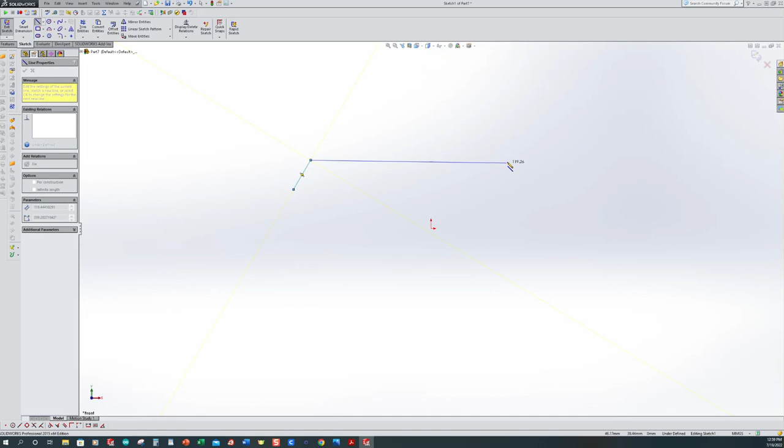Don't be too concerned. Make sure that this thing snaps horizontal. Let's pull your angle out. My sketch is just all jacked up, but I want to fix all of this stuff.

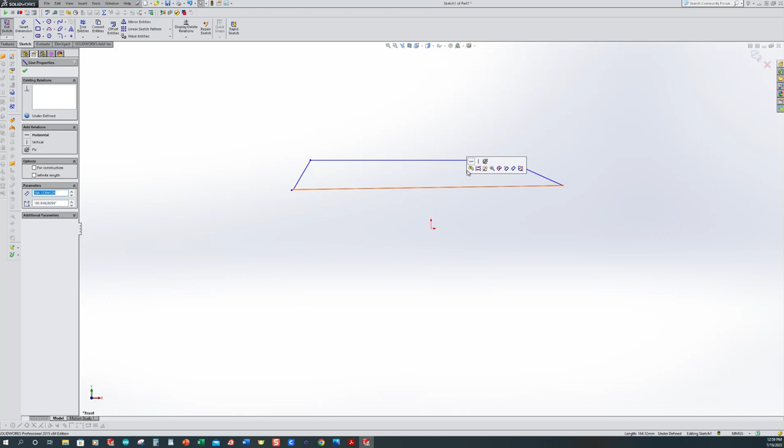My top line is horizontal, but I'm looking at this bottom line and it does not look horizontal. Let's go ahead and correct that. I'm going to come up and pick on the line and not move my mouse pointer, and then we have the little flyout that pops up that says make horizontal. So that's kind of a quick shortcut.

I'm going to click out in the paper space, and I know that both of these lines I want to make equal. So I'm going to hold my control down, make a selection, make the other selection, and make both of those lines equal. It may not be the shape you're looking for initially, but...

We're just adding relations, so we got to take this thing in baby steps. I also noticed that when I drew this, I've got a little bit of an issue down here in the bottom left. If you're looking at that, I'm going to zoom way in on it. There's an extra line for some unknown reason, so I'm going to pick it, hit the delete key, and then use the F command, just the F on the keyboard, for the fit. So we've now moved this thing out here.

I don't know that I've talked about using a point on here, so you can actually use points for relationships. I'm going to come up and select a point, and tickle this bottom line until the midpoint shows up. All I'm really doing here is making this thing a little easier to select. I've placed that point there, and I'm going to hit my escape key. Notice I can actually see that, where I couldn't really see the midpoint before.

I can select it a number of other ways, but right now I just want to put a point here so we can cheat a little bit.

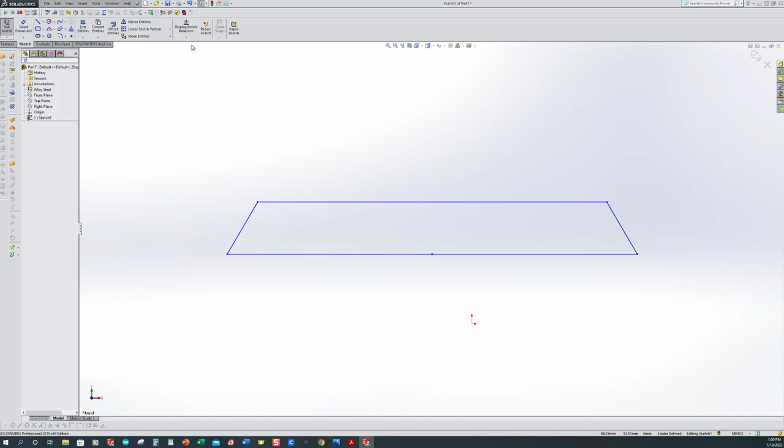So I want to come up to add relations, or display, delete, and add relations. I'll drop the chevron down and select add relations. I want to pick that point I just drew and our origin, and make those two coincident. Now notice this line's turned black.

Click out in the modeling space somewhere, go ahead and accept that. Click out in the modeling space, and our point is fully defined, and this bottom line is pretty well defined, except the endpoints on it do not have a distance on it.

So we're ready to start doing some dimensioning now. Memory tells me that this is 80 millimeters.

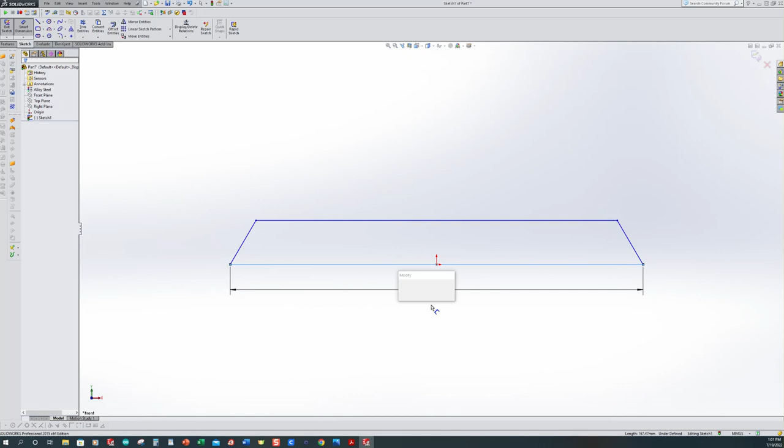I could come up here because opposite angles are going to be equal, but I'm going to come over here just to keep it like what our drawing said, place it down, and that's going to be 45.

Now notice we've got our drawing that is pretty well black, except we've got to figure out how to get this little line up here that's still blue. We need to make sure that we fully define it.

So I come up and I look at my dimensions, and it looks like we have a dimension of 10 millimeters across. Not 10 millimeters on this, but let's go ahead and dimension this.

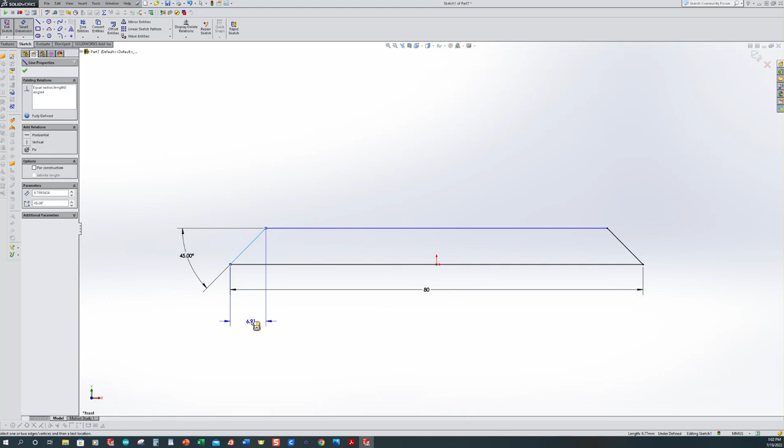So when I pick this line, I pull it out. I have this parallel dimension, not what I want. I can pull it up here, or I can pull it down here - either one will be sufficient. I'm just going to pull it up here, place it out of the way for a moment, and we're going to say that is 10.

Now I am fully defined, so I'll click out in the modeling space. I'll look over here in the bottom right hand section, and it does say that we're fully defined. So when I exit my sketch, we're ready for our extrusion.

Now when I look back at my drawing, it looks like this extrusion is going to be 30 millimeters. So let's go ahead and say 30 in our depth or magnitude, and we're going to accept it.

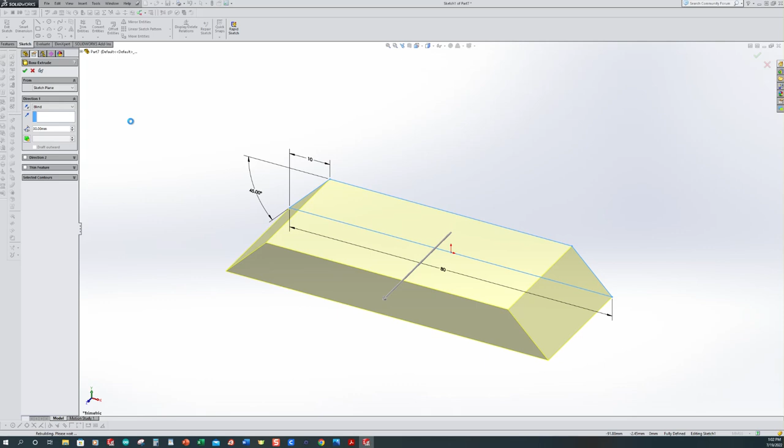Now it doesn't look like we're anywhere closer to where we were, but all we've done is this bottom section. So the next thing I want to do is the basic shape of this feature here is a rectangle. When we look at our drawing, it says that the rectangle is 40 wide and also 40 tall overall. So I want to select an extruded boss base.

It asks us where we want to start from. I could start here or on the back side, or I could pick a plane. I'm just going to pick this front face for ease, so I'll select the front face.

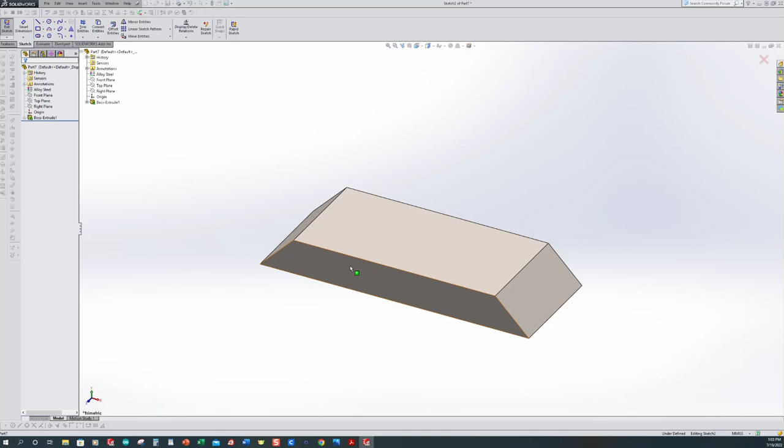I need to use the Control-8 command because your sketch may not orient normal to you, but we want to draw this thing where we're looking normal to it when we first get started.

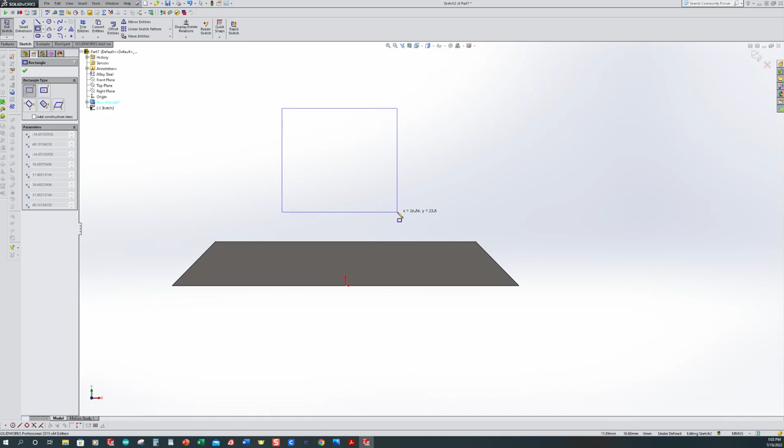So I come up and I want to select a corner rectangle. Make sure that you are in corner rectangle - if you're in something else, go ahead and select it. I'm just going to draw something along these lines, then I'm going to hit the escape command.

With that being said, I want to come up and add a relation. My point's still selected since I didn't use the escape command or get out of it, and it says existing relations is midpoint. I could use the fix command, but that's not what I want. Instead, I want to come down and pick our origin.

So now I have the point of origin and point number 5, or whatever point yours is called. It's giving me the most logical thing would be vertical because it's not really close to it. Horizontal doesn't make a lot of sense, but coincident is the one that I really want. So I select coincident, and now this bottom line has turned completely black.

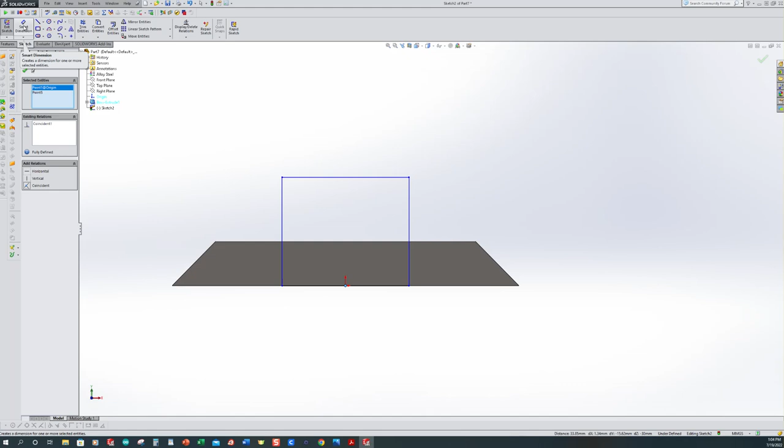So smart dimension is the next command we want. We remember that this thing is 40 millimeters wide, and we also have to give it a height dimension because we just have this blue line to contend with. So I come and pick this vertical line, pull it out, place it down, and it is 40.

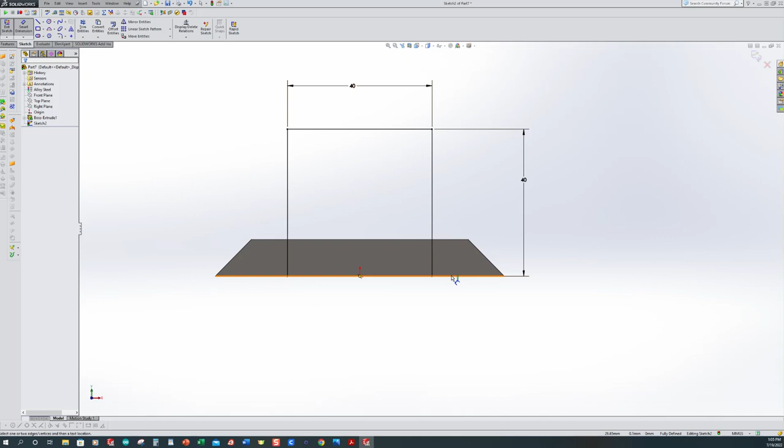We now click out in the modeling space somewhere. Both dimensions are black, we've got this constraint down here, and we are fully defined. I'm going to rotate mine around just a little bit.

I think my extrusion is going to go the wrong way. We'll soon find out, so I select exit sketch. Sure enough, it is headed out the wrong direction, not the one I want. But we're going to do something slightly different.

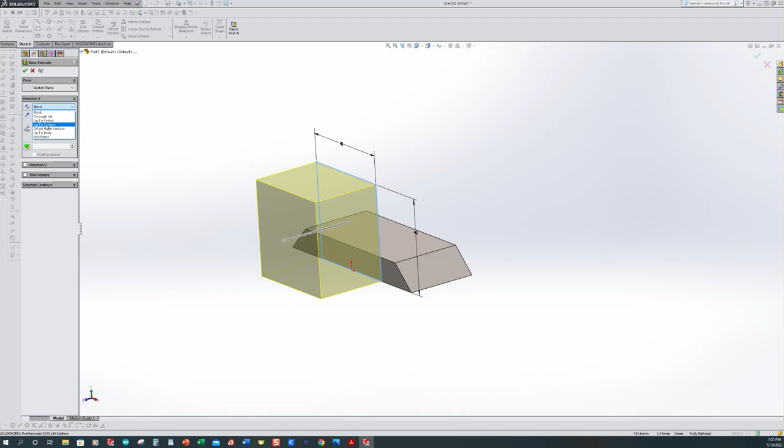I know that it's 30 millimeters, but what I want to do here is use a new command we haven't done before, and this is going to be an up to surface. Now, what surface do I want it to go to? Because if I change one extrusion depth, I want to make sure that something follows it all the time. So the surface I want it to go to is this back side surface.

It gives me the preview. I am happy with what that looks like, so I'm going to go ahead and accept this boss extrude.

Now, another thing that people tend to get really bothered by is this semicircle right here, which has a radius of 20, giving us a diameter of 40 millimeters across. It's also centered up on this and runs tangent to these little lines here.

Some people want to draw these semicircles and try to get it all done in one fell swoop. We're not really going to worry about that. The other part about this is this thing sticks out 10 millimeters on one side, but it goes all the way to the back side on the other.

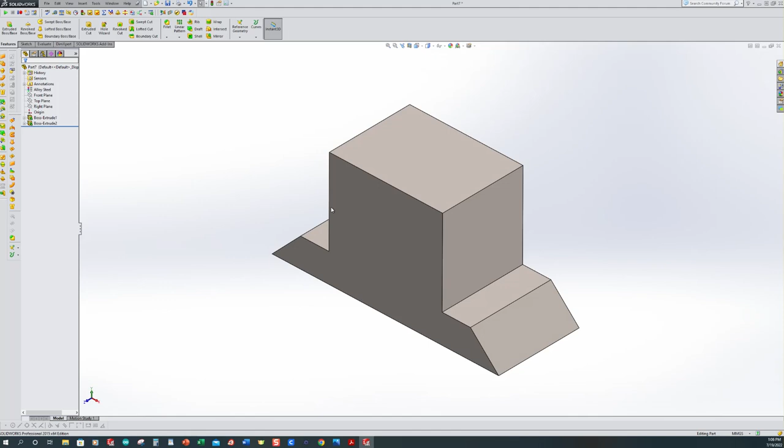So we're going to use that hint we had just a moment ago. Control-7, so everybody's view kind of looks the same. We want to use the extruded boss base, and now it's going to ask us what face, plane, or planar surface we want. I'm going to pick this very front face that we're looking at.

Use my Control-8 command to draw normal, and now I want to come up and grab a circle by center. Just make sure you have it on the circle itself, not the perimeter circle. So I'm going to come tickle this upper edge.

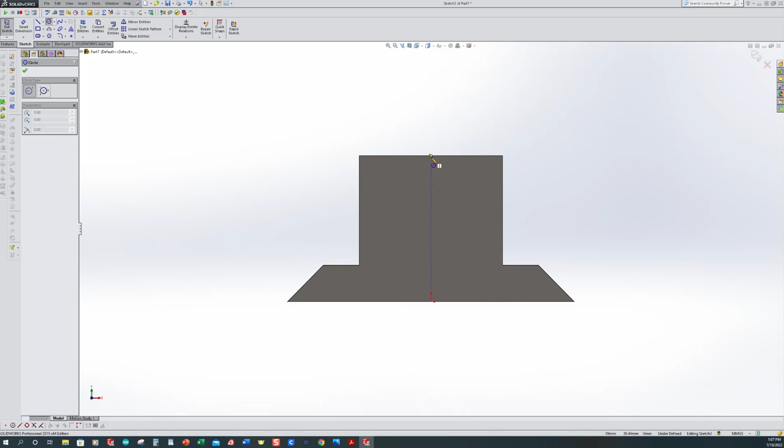Notice how the midpoint shows up automatically for me. I don't want to click on anything, I just kind of tickle it, and then once it shows up, one mouse click.

Now I'm going to pull it out and let it snap to this outer edge to show coincident. I'm going to use my escape key.

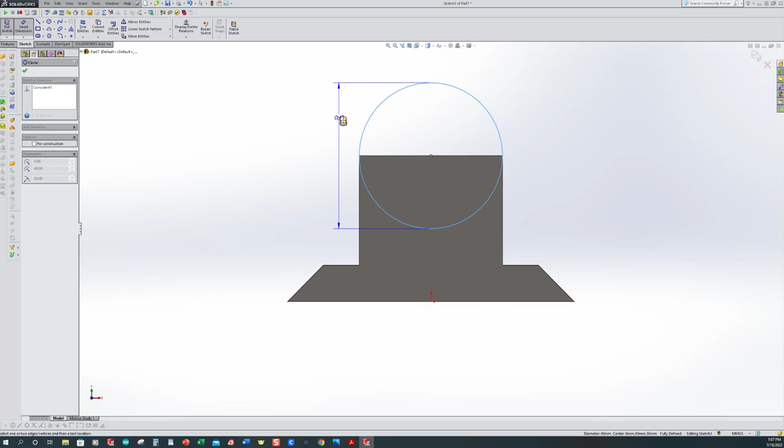Well, I'm fully defined, but how do I verify that this is actually 40 across there? So I want to use my smart dimension, and I'm going to pull a dimension on this circle that we just drew, and place it down. It should yell at me a little bit, and I want to make this dimension driven, so this dimension is driven by the circle itself, not the other way around.

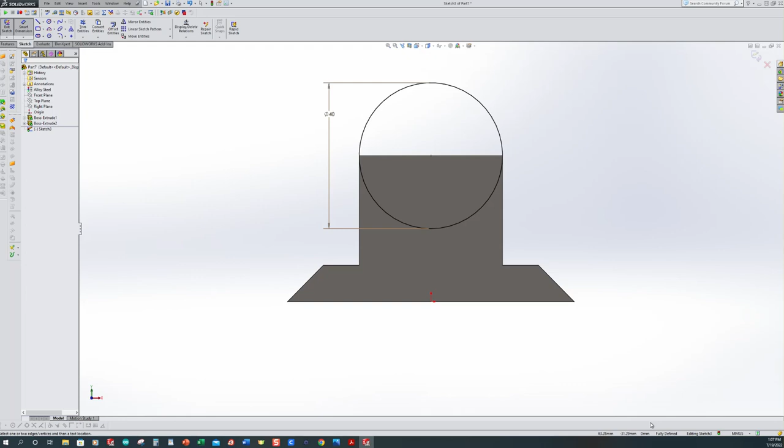We're not driving the circle with this dimension right here, so I'll click out of the space. Notice this one is grayed out a little bit. Our sketch is fully defined, but I'll look down to the bottom right, and I'm going to rotate this around just a little bit so we can see what's going on.

So I want to exit my sketch. Now, I know that the extrusion is sticking out this far. It says 40 overall. I know that this is 30, so we know that this is going to be 10. Now, so that direction is 10. Now, what we haven't used before is direction 2.

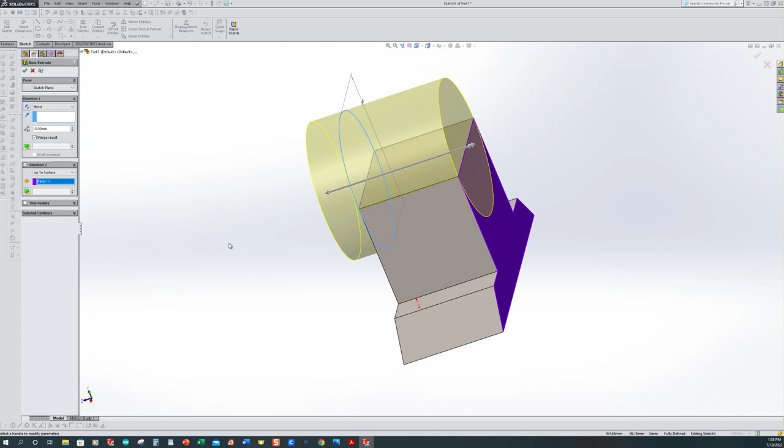I'm going to say direction 2, and instead of it being blind, because if we change the thickness on this later on, we would have to go back and change all of those features — not what we want to do. So instead of it being blind, I want it to go up to a surface. I'm going to select up to a surface, and the surface I want is this back face. So it's giving me the preview. I'm happy with that right there, so I'm going to go ahead and accept it.

Now, I can either cut the top of it off, or I can cut the hole in the middle of it. I think I want to go ahead and cut the hole in the center of it. There's a hole right here that's got material missing, so we want to select Extruded Cut.

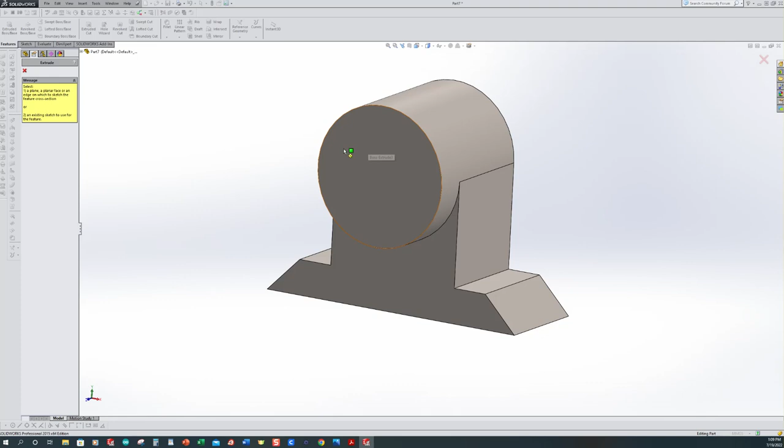I want to pick this face, Control 8. I want to use a circle again, so I'm going to come tickle the edge a little bit. Now my center point showed up right there — that's where I want to place my circle. So, one mouse click, pull it out, second mouse click, and now we want to dimension this thing.

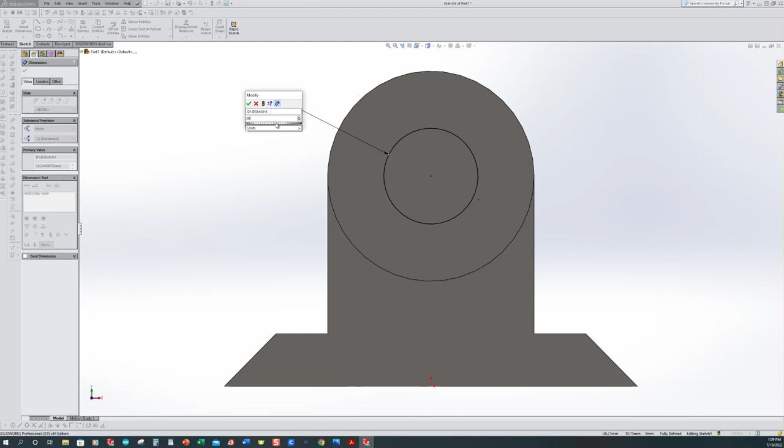Smart dimension — now my dimension said that it was a R10, so you got to kind of pay attention to this. This is not a full diameter circle, so it's actually going to give us the radius here. On this, it's giving me the diameter, so I have to keep that in account. So if the radius is 10, then the diameter is going to be 20.

So we're fully defined. Click out in the space, verify it down in the bottom right, exit our sketch, our cut. We want to go through everything, so we want to accept it. Now, looking at this, we got one more feature that we got to do. All this material up on the top is removed.

So let's go ahead, Control 7, so we're all modeling on the same thing. We want to select Extruded Cut. Alright, so what plane or planar face? I'm going to pick this very front face, and I want to use the Control 8 key to make it normal. I'm going to come up and grab a regular line.

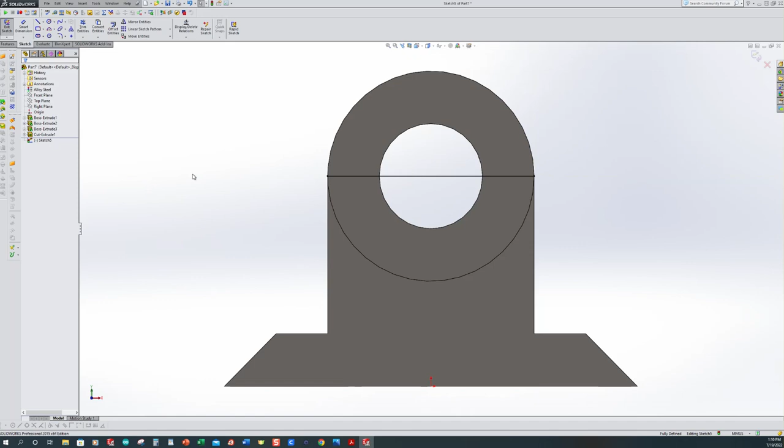Now I'm going to come tickle this edge. I want to come up to where this center point is — notice where that is, it gives me my center point of my circle and everything. So I want to place it here. One mouse click, pull it all the way across to the other side, and a second mouse selection. Hit escape a couple times. The line turned black, I'm fully defined.

I rotate it around, so we're going to exit our sketch. We want to cut. Notice my arrow is going to remove this material up here. I want to not have to worry about it anymore, so I'm going to say through all. So I'm removing that, and I accept it.

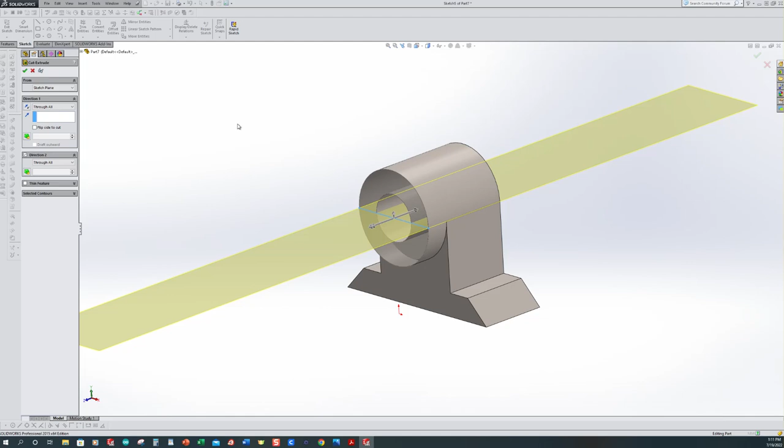So Control 7, and I'm pretty sure that's what our model is, but let's verify it. We're going to use the Evaluate tab, so Evaluate, and then we want to go directly above it at Mass Properties. So we got 438 grams, 57,000 cubic millimeters, and 11,819 square millimeters on our surface area.

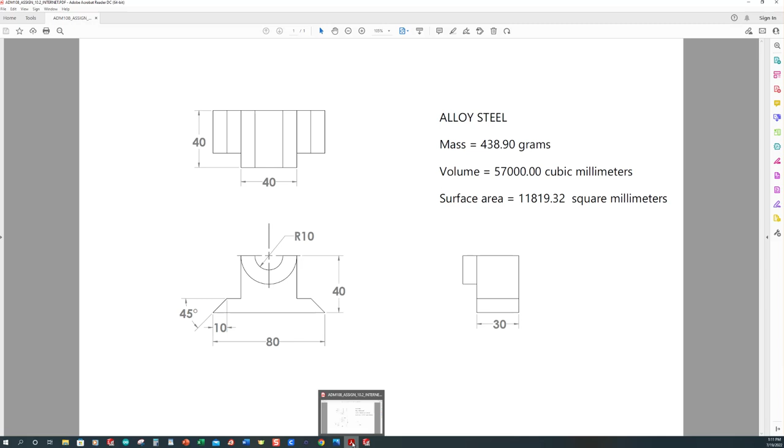So we go back to our drawing: 438, 57,000, 11,819. 438, 57,000, and 11,819. So I'm happy with this. Let's go ahead and save our model out, and we're ready to move forward.